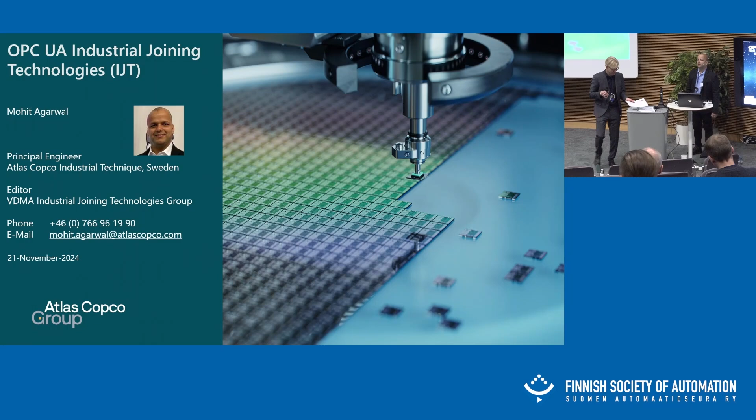Thanks for the introduction. So today I'll just talk about two different hats, something similar to how Eric did, but not to that deep details. So I'll just go through Atlas Copco. I will not talk about all the Atlas Copco products because product marketing from our company will do that better, but I'll just relate how that ecosystem is linked with standardization. So that is the part I will cover with respect to Atlas Copco.

So let's get started. Atlas Copco devices are being used from mobile phone manufacturers to wind towers, from automobiles to aerospace. Many customers use the Atlas Copco ecosystem and devices. And then there are specific needs from the automotive industry and aerospace industry where they would like to have a transition towards smart factory. So to support that transition, Atlas Copco has a framework called Smart Integrated Assembly.

We have a pyramid on the left side, where the bottom level is the devices which provide a quick status. We perform a specific operation, whether it is okay, not okay, and then the next level will be the quality check, whether the controller and tool are running properly or not. And then we go to the upper levels where we do station management, production optimization, etc., and then data analytics. So Atlas Copco provides a lot of framework.

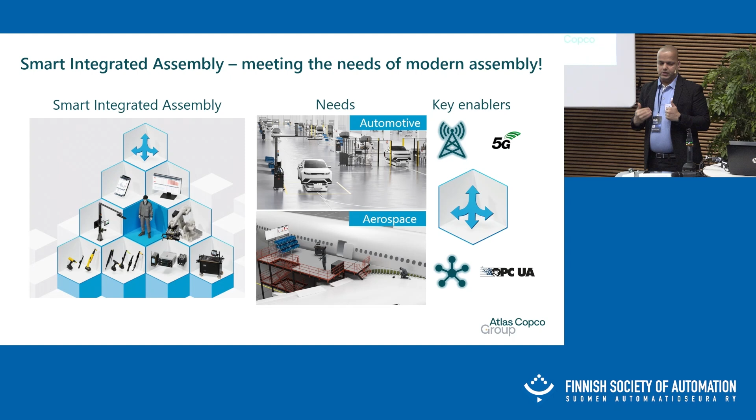But one of the key factors towards smart integrated assembly to support the smart factory journey for our customers is these enablers: OPC UA, 5G, radio modules, etc. All these are necessary for covering the smart factory use cases. So let me take a small example. In this slide, traditionally how factories have been organized, there have been devices. Every station had a fixed set of devices.

But now customers would like to move: okay, I want to have a dynamic assembly of this product in any station within the factory. So if customers have these use cases, we also have to come up with smart tools for that. In this image, all these tools have similar capabilities. The torque range can differ from 20 Newton meters to 150 Newton meters. But the advantage here is,

compared to the traditional approach, the operator can carry the tool, go to any station or near any product, and based on the context. What is the context? Maybe the location where the tool is, or the context can be the product where the operations have to be performed. And then based on the context, a dynamic process is selected.

So what happens now? The customer doesn't have to have a fixed set of devices within a station or within a specific area. The tool can move around, the operator can move around and perform the tightening dynamically. So this is how the smart factory use cases are, and we provide smart tools to help towards that journey. So that is the context.

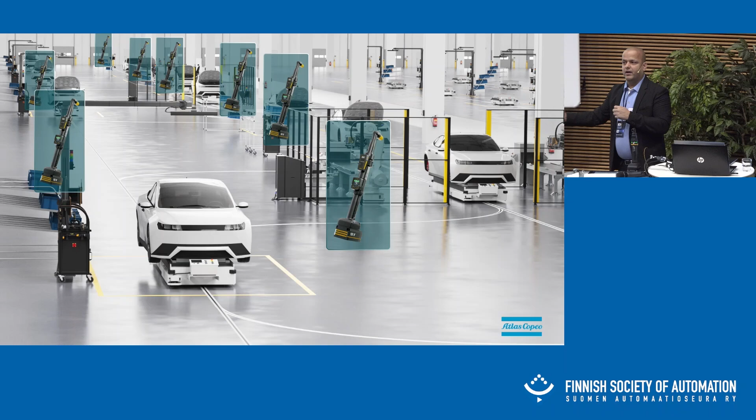But in all this, when I talk about context, I mentioned location. Yeah, but these data have to be exchanged in a standardized way. So that is very important, and that's where we will link this to OPC UA. Now, in all this ecosystem, since morning we have had multiple presentations. The key thing is data, how systems are consuming or talking to each other, the interfaces.

Traditionally at Atlas Copco, we have had something called Atlas Copco Open Protocol. This is 20 years old, a pretty old protocol as of now. It is used in production, it is working perfectly fine. But today's industry has much higher demands. Security is a demand. And Atlas Copco Open Protocol was only for the tightening industry. Atlas Copco in the last 10 years has acquired a lot of companies related to gluing, riveting, and so on. So there are growing needs and a growing ecosystem.

And cyber security or security features are not supported in the existing protocols. That is also one of the key concerns mentioned about hacking, where Microsoft Azure sees 600 million hack attempts per day, something like that. So these are the demands in the industry. And apart from Open Protocol, we also had customer-based protocols, like customer A wants data in a specific format, customer B in the same way.

So the development cost is huge, and integration was becoming very difficult when we want to achieve the smart factory use case. For that reason, OPC UA stands out as mutually beneficial. It is beneficial to our customers and also to us. It is not only for Atlas Copco, but for all the vendors of joining or tightening systems. So this is where we will talk about OPC UA within the joining system context in the upcoming slides.

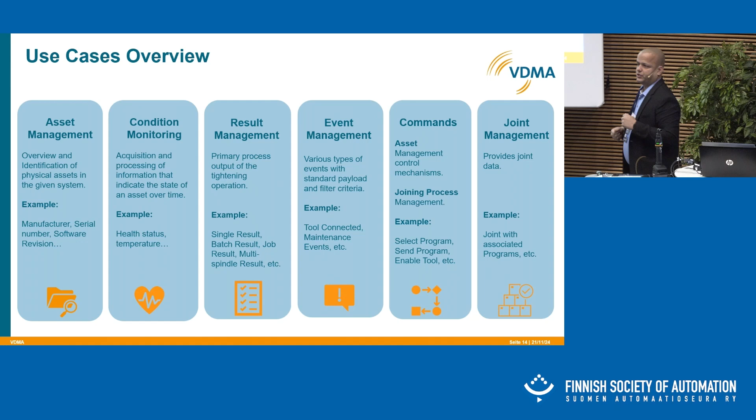The next step is to go through the models. I will not go into the details about the properties, but just explain some underlying ideas and how we have utilized harmonization, which is very important for us. So if you see here, we have defined a placeholder called joining system. Joining system is not an asset. It is a collection of building blocks. So we have building blocks like asset management, result management, joining process management, joint management. And we have used base specifications like Machinery, DI, and Asset Management Basics so far.

And this is stress tested, drop tested, and duration tested. So I had a real-time testing now.

So we have different assets based on different devices, configurations or use cases. But one point with respect to OPC UA is, we talk about identifying a specific device, but I personally have been participating in 8 out of 10 harmonization group meetings, and we tried not to reinvent anything. Why should I define a serial number property? What should be the data type? Why should I define the semantic? It is available from base specifications. So we have reused whatever is available from the other base specifications like DI and Machinery.

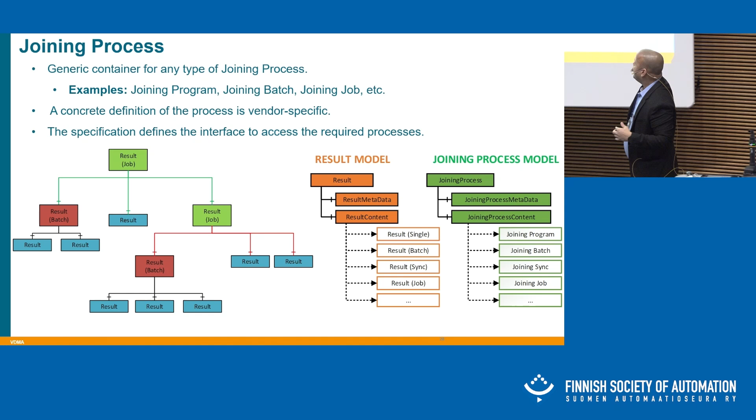Similar to the result model, on the left side we see the result model, and then we have defined a joining process model. Now, a joining process can be a single program, or it can be a batch process, or a job process. We have defined a one-to-one mapping so that it is very easy to map the configuration and the outcome of that. But one thing which we did not define in the specification is the definition of program.

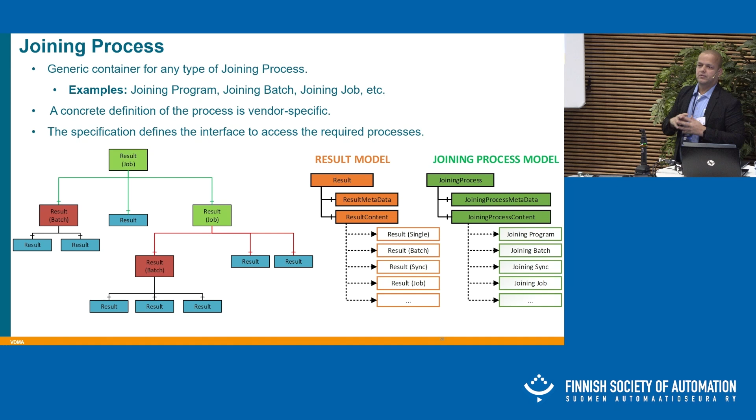There we do not have an agreement, and also there are business reasons. This is the room for innovation, where each vendor wants to have some innovation at their level. So this is not defined as a standard. It will be a blob, a vendor-specific blob, which can be sent and received. We have defined the respective methods to send and receive or control the programs, but we did not define the definition or the content of it in the standard.

The next use case is joint management. As I said, joint management is very important for our future smart factory related applications. If I have a bolt, anyone who doesn't understand the tightening industry and wants to tighten a bolt, would it not be cool that he just comes and tightens it automatically based on the type of bolt, based on the context?

If I tell the user, okay, you should do a specific process, check you have configured a torque of 7 Newton meters, you have configured the angle to this value and so on, that is the complexity, and if something is done wrong, there will be problems. Quality is very important. Consider some operator did the tightening for the seat belt, and if that was not done correctly, that is a safety critical joint.

So these things can be handled in a much better way with the joint management use case, and this is the first version, which would definitely have more improvements based on the prototypes we do on the joint.

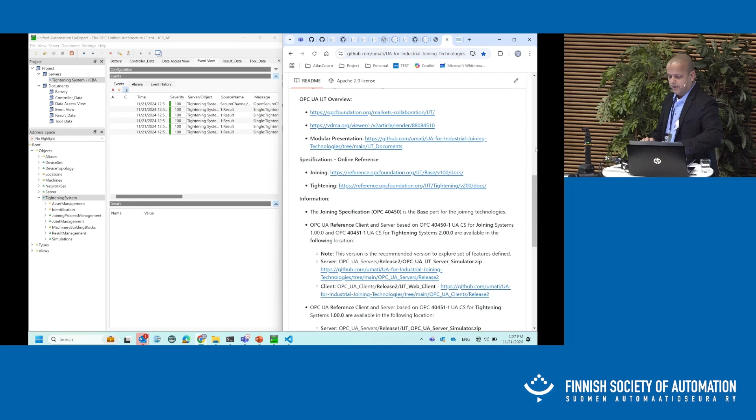So let me go to the demonstration. This is the GitHub where we have also published a complete 100-slide modular presentation. Who doesn't know OPC UA, who doesn't know companion specification, they can read about it. It's publicly available. And then we have also implemented a reference server and a reference client. Why was it important? Because customers were using traditional protocols. Yeah, it is very complex. I don't know how to consume this data.

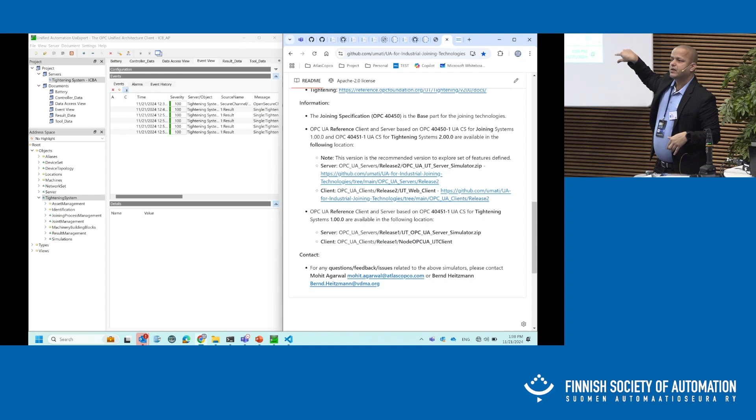Fine. We have the demo client. It is just 20 lines of code. If you want to read the result, this is the type of algorithm. If you're using SDK 1, SDK 2, SDK 3, it doesn't matter. Understand the algorithm. In a different SDK, the API or the name of the function might be different, but the algorithm is very cool. 10 lines, 20 lines to consume this data. Maybe 30 lines to consume data 2 or something like that. So that's where the client reference implementations are very important. And let me now directly show a demonstration.

Left side is UA Expert. Thanks a lot to Unified Automation for this wonderful client. This is a very stable client, I can say. And one more thing is, when I talk about clients and making life easier for our end customers, there are some challenges also. A lot of client providers and some gateway providers don't support some core functionality. But when we spoke to Prosys, they were quick enough to support a specific functionality which we can demonstrate easily, for example, extension objects. I'm really thankful that some gateway providers are very quick in adapting that, but there is room for improvement for other providers as well.

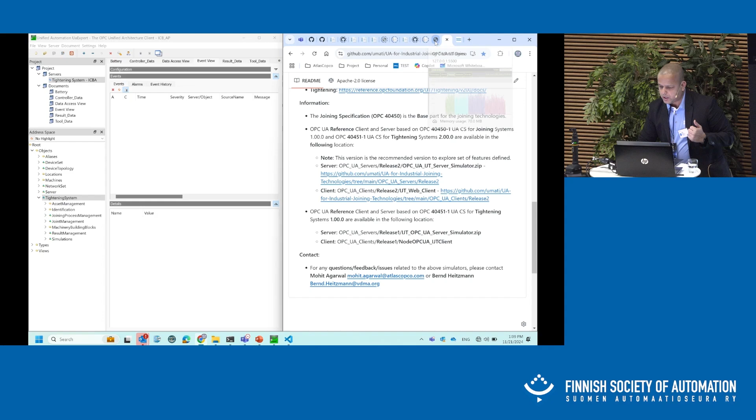So let's go through the demonstration. I have this tool running, and then I will go to the reference client which I have implemented. Let me refresh this so that all data is cleared. So the right side is the reference implementation. Left side is the generic client. The OPC UA server is running on the tool. And if you see, traditionally, this is not a good tightening because I'm doing a rotate operation. The torque values are just ranging from 0.01 to 0.02. So if you see, we got the complete result model here, the result for a single one. And these are the trace samples.

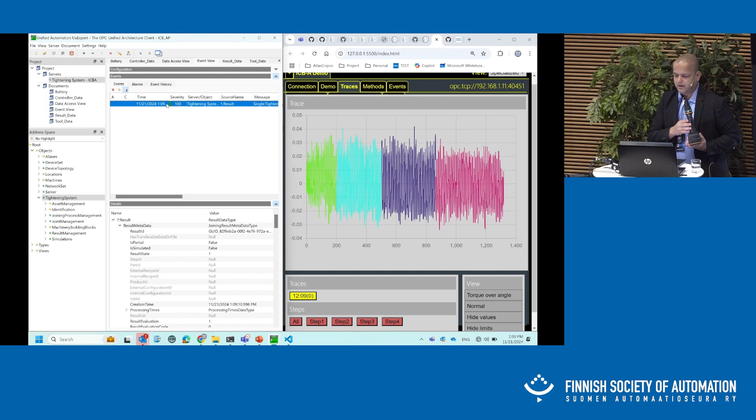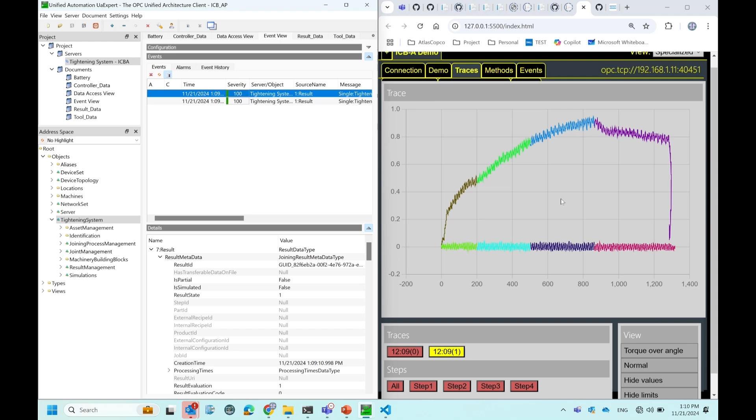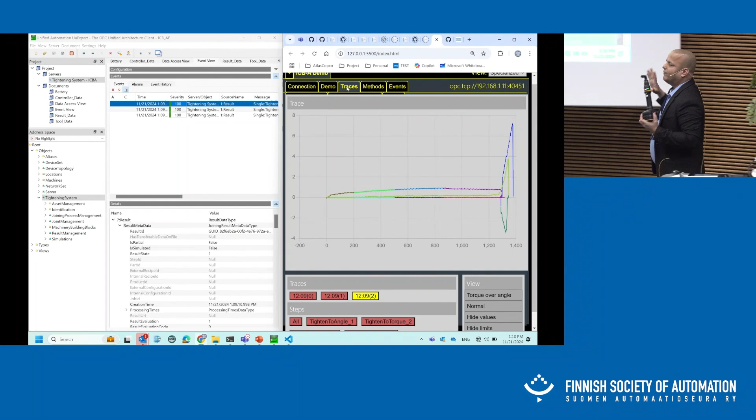Traces are very important. We send more than 5,000 samples when we do one single tightening. Why is it important? Since I did a rotate operation, I don't have a joint. I can't control this. An actual tightening which is successful would look something like this. Let me simulate an actual tightening. So within our tightening domain, somebody who sees a graph like this will identify that this was a successful tightening. This is very important data from our domain perspective.

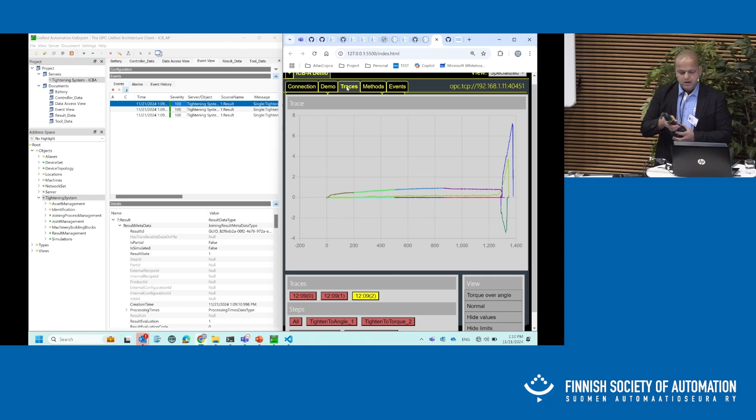So as I mentioned, maybe I should just try to wrap up now. These are the references. To summarize, we have the need to help our customers on the smart factory journey. And how are we doing that? With a framework called Smart Integrated Assembly. But all in all, one important thing: systems have to talk to each other. Devices have to talk to the systems and each other. How? With standards. Which standard? In our domain, the IJT standard. But is that good enough? No, harmonization is also very important.

Is that still good enough? We need help from the providers. We need the OPC UA providers and different integrators to support these functionalities to make it happen. What can a working group and vendors do? Implement prototypes and so on, publish them for public use, and show that it is not complex to implement, and that it is not bad performance, which is always a rumor. Somebody has to prove that it is not bad performance.